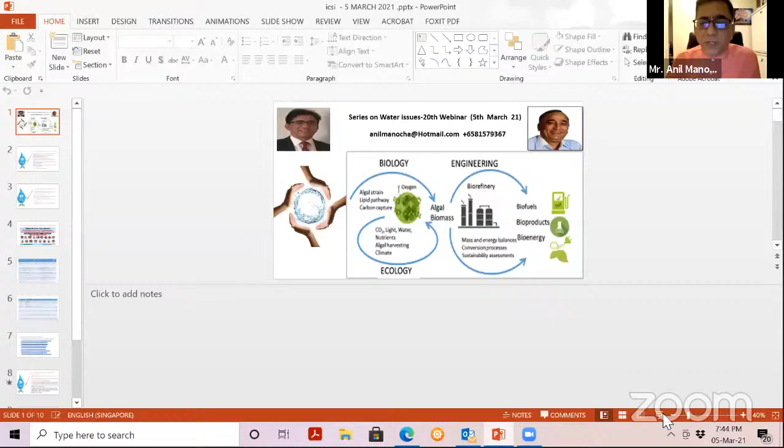Good evening, friends. Today we will continue our journey on the subjects we have been talking about so far on water. Today we are holding our 20th webinar, and just a snapshot of what we have done so far before I request Dr. Yoga Lakshmi to take over. If you look at the journey so far, we have conducted close to 20 webinars, and we have discussed topics related to water availability. In water availability, we talked about surface water, sea water, glaciers, underground water, rivers, and we also talked about how there is a stress on availability of water because of consumption and other issues.

We talked about the subject of water uses, domestic, industrial, and agriculture, and we also learned that of the total water available on this earth, only 1% is locked in rivers and underground sources, which is generally used for domestic, industrial, and agriculture purposes. And agriculture is a major consumer of water, which consumes something close to 70 to 80% of water.

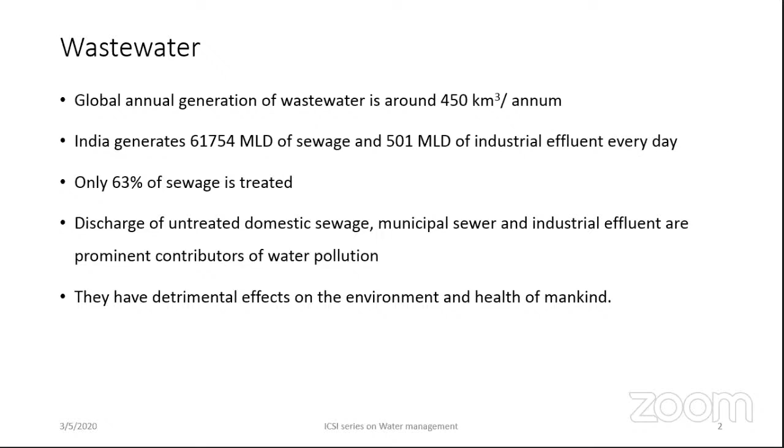Nowadays, you cannot see any water body, be it a pond or a lake, without this luxurious growth of plants, which is generally termed as eutrophication. Now, this has not only affected the health of the environment, but in general, these pollutants are being consumed daily by us, and this also has resulted in health hazards.

So now the second aspect which I'm going to talk about is biorefinery. Before talking about wastewater biorefinery, we should understand what is actually biorefinery. Now, biorefinery is a concept which integrates the biomass conversion process into other value-added products, like it can be any sort of fuel, like bioethanol or any form of biogas, biodiesel, and the other value-added chemicals and biomass.

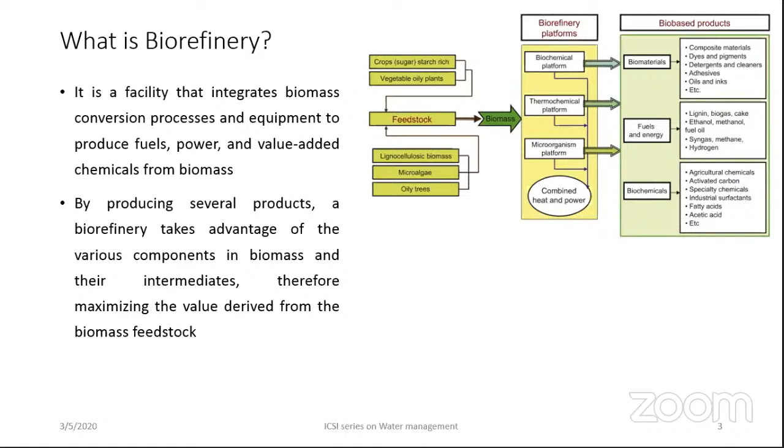Now, wastewater biorefinery. So before starting this, as sir said, there are two concepts. One is water being wasted that ends up in a wastewater treatment plant, and this wastewater treatment plant is treating the wastewater that is generated. Now, to run this wastewater treatment plant, you need energy. On the other side, we are also continuously facing energy crises.

So energy crisis on one side, wastewater being generated on the other side, and another major problem you can also relate to climate change, because during wastewater treatment, a lot of greenhouse gases are emitted from different treatment processes. And for generating energy, we burn fossil fuels, and that is also releasing a lot of greenhouse gases. So every aspect of this is generating a lot of pollution, and it's affecting the environment to a greater level. So this wastewater biorefinery concept can minimize all these three facets of the environment.

It can look into the wastewater treatment, it can give water which is fit for use on one side, and then it can convert all the organic carbon, nitrogen, phosphorus, and other nutrients into value-added products. Fuels can be generated, and also we can minimize the greenhouse gas emissions. So wastewater biorefinery can bridge a gap between the concept of biorefinery and wastewater treatment. It will generate products which would be economically viable and enhance resource productivity, and it will also produce water from the wastewater up to an acceptable quality level.

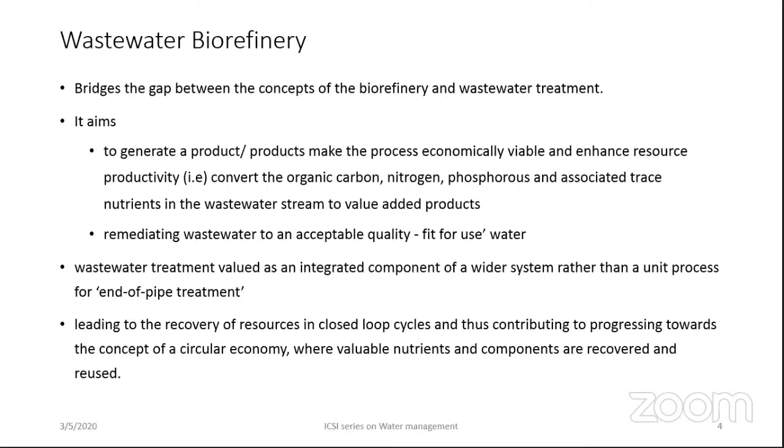Now, the focus of this wastewater biorefinery is not only just treating the water, but also recovering the resources from the wastewater. It is like a closed loop system, and you can also say it is a sort of circular bioeconomy. Now, I have been saying since the beginning of my lecture that wastewater can be thought of as a wealth. It's being looked into as a resource, and I told you there's a paradigm shift.

If it is portrayed as a story, earlier when these wastewater treatment plants were established, the focus was only on organic removal. Then with the problem of eutrophication, the scientists thought it's not sufficient only if you remove organics. It is very essential that you remove the nutrients too. Now, once the nutrient removal technologies have emerged, the focus is on emerging pollutants. On the other aspect, it is also thought of as a resource.

Now, wastewater is organically rich, and it contains around 37,052 tons of COD. COD is nothing but the organic constituent which can be potentially converted into any form of energy or any other value-added product.

The focus of the wastewater treatment plant is not only treating and discharging, but it affects human and environmental health. So many countries, to focus on environmental sustainability, have converted wastewater treatment plants into a resource or biorefinery. Many countries are currently working to attain this sustainability, converting sewage treatment plants into resource plants.

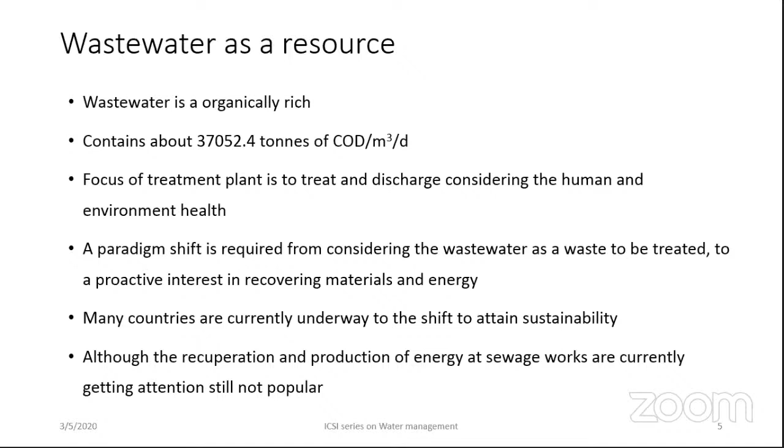I'm not sure people are aware of wastewater treatment plants, so I'll outline what one is and from which process energy can be generated. I'll be focusing only on the energy aspect, not on what chemicals or biochemicals can be produced. My lecture will mainly focus on fuel generation aspects and what technologies can be used for recovering energy from wastewater treatment plants.

So just to outline what a wastewater treatment plant is: the wastewater generated from different households is carried through a sewer network and brought into a common pumping station, from where it is pumped to the treatment process. A wastewater or sewage treatment plant can be divided into three phases: primary treatment, followed by secondary treatment, and third, tertiary treatment.

In primary treatment, the focus is only on physical separation, where floatables like plastics or any other big logs or twigs are all removed by the screen chamber, followed by the grit chamber, where small grit, stone, or silt material is removed.

Once the grit is removed, it is transferred into the third chamber, the primary clarifier, where solid materials in the wastewater are removed by simple settling. It is allowed to settle for almost 2 hours, and the solids are settled.

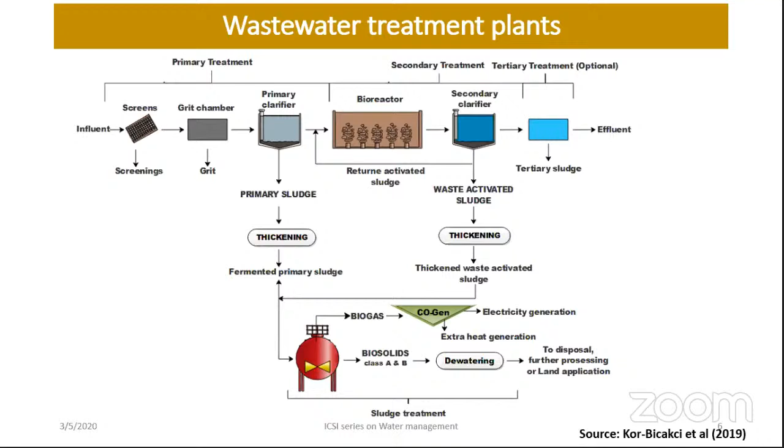Now if you look at the source of energy in wastewater treatment plants, the source of energy can be looked at in two different aspects: the wastewater itself acts as a source of energy, and the second is the sludge or biomass generated from the wastewater treatment plant.

That is the primary sludge, which is generally the solids in the wastewater, and the waste activated sludge, which is the biomass from bacterial activity. When they consume organic matter, they start producing biomass, called waste activated sludge. They also act as a source of energy.

If you look into this, almost 30 to 55% organic richness is there in the sludge, and it also contains nitrogen, phosphorus, and potassium, along with some heavy metals. The calorific or heating value available is around 12,000 to 15,000 kilojoules, which can potentially be converted into energy.

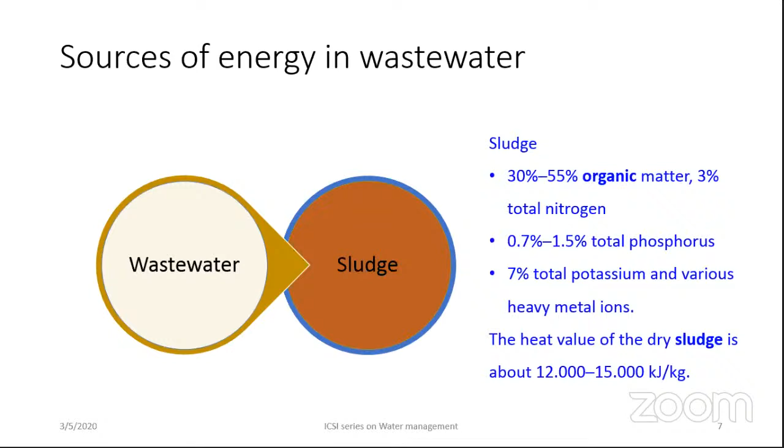Coming to the technology available for converting this energy, I mentioned anaerobic digesters. They are a classical example, and many other technologies are coming up based on this anaerobic digestion concept. Let's look into what anaerobic digestion is and what process occurs inside.

I'll talk a little about the digesters, how they work, not too deep into the technicality. Anaerobic digestion is done in the absence of oxygen, where the organic matter present in the sludge is degraded by the action of microorganisms in the absence of oxygen. The end product produced is biogas, and you also obtain a nutrient-rich digestate or slurry.

This digestate has a lot of nutritive value, and it can be used as a fertilizer or manure.

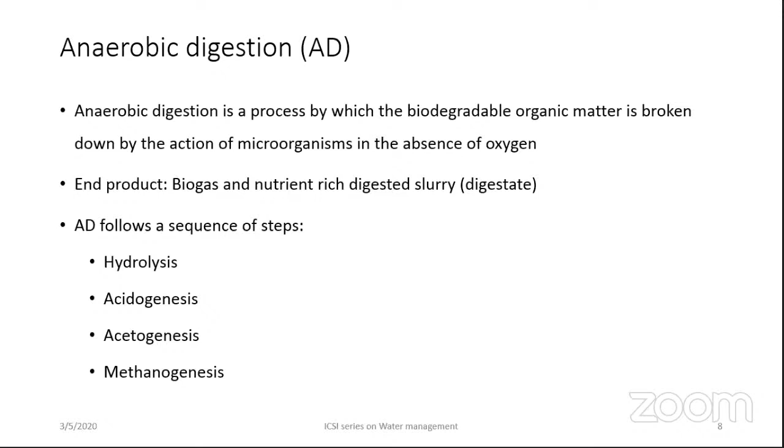The anaerobic digestion process follows four basic steps: hydrolysis, followed by acidogenesis, acetogenesis, and methanogenesis. This flow chart will clearly explain the different phases.

The sludge, which has complex biopolymers like proteins, carbohydrates, and lipids, is broken down into simple substances through the hydrolysis process, converting into simple sugars, amino acids, peptides, and fatty acids.

In the conversion of complex polymers into simple polymers, a specific group of bacteria, the hydrolytic bacteria, breaks them down. Once the simple monomers or oligomers are formed, acidogenic bacteria act on them and convert them into propionates and butyrates, which are nothing but short chain volatile fatty acids.

Here the acetogens act during the acetogenic phase, and convert this into hydrogen, carbon dioxide, and acetates. These acetates are further consumed by the methanogenic bacteria and converted into methane. Even the hydrogen is also converted into methane.

I would like to add a point here. If our purpose is to stop with hydrogen, you can use a methanogenic inhibitor to kill these methanogenic bacteria so that methane will not be produced. Methane is also a greenhouse gas with global warming potential, so if hydrogen is a clean gas with high energy yield, we can play with the microorganisms, stop methane production, and generate hydrogen instead.

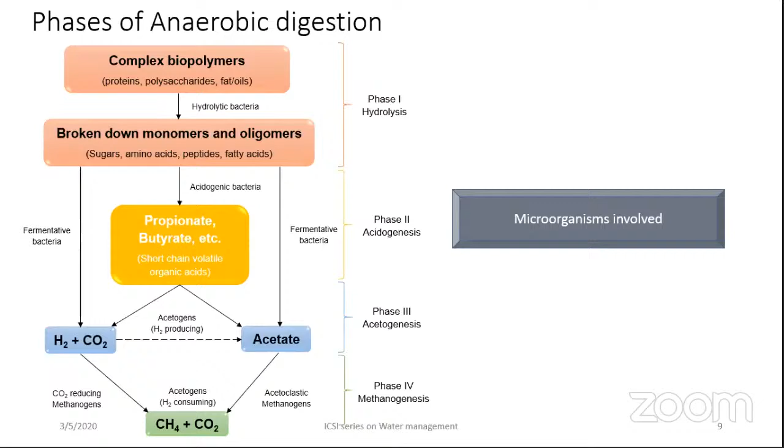Looking into the composition of biogas generated, it has a calorific value of around 18,000 to 26,000 kilojoules per meter cube. The composition has methane ranging between 55 to 75%, carbon dioxide around 25 to 45%, followed by water up to 7%, and other trace gases like hydrogen sulfide, ammonia, nitrogen, hydrogen, and so on. So biogas is also generally called methane gas, similar to a biogas plant, and you can bring this into a natural gas standard fuel.

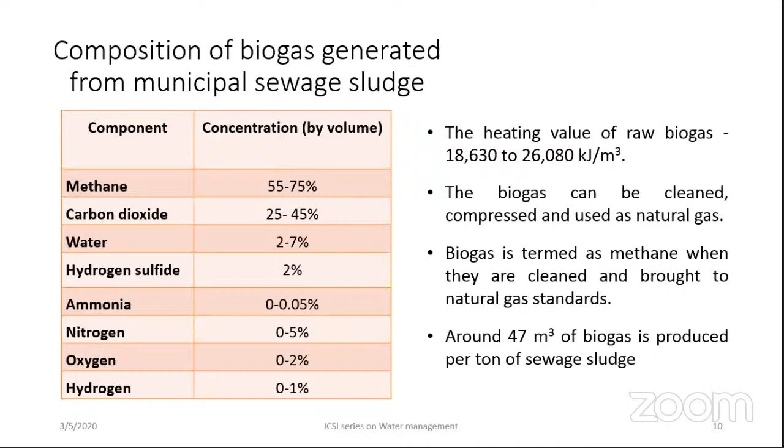As operating conditions, the favorable pH is 6.5 to 8, and temperature works in both mesophilic and thermophilic conditions. 20 to 35 days are required for conversion of this biomass into biogas. Basically 3 steps are involved: liquefaction of solids, digestion of soluble solids, and gas production.

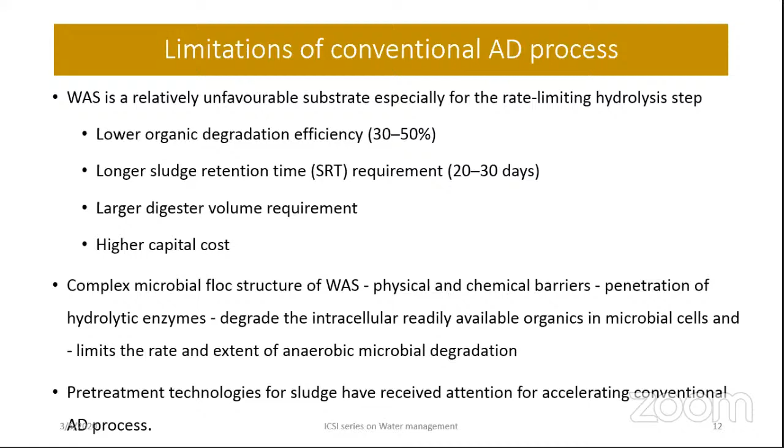So this is one technology where the waste sludge or the solids generated from wastewater can be used and converted into biogas. Now, the other technologies which are used directly to obtain energy from the wastewater, I have outlined here three different technologies. One is the Upflow anaerobic sludge blanket reactor, the anaerobic baffled reactor, and MFC or MEC, the microbial fuel cells, microbial

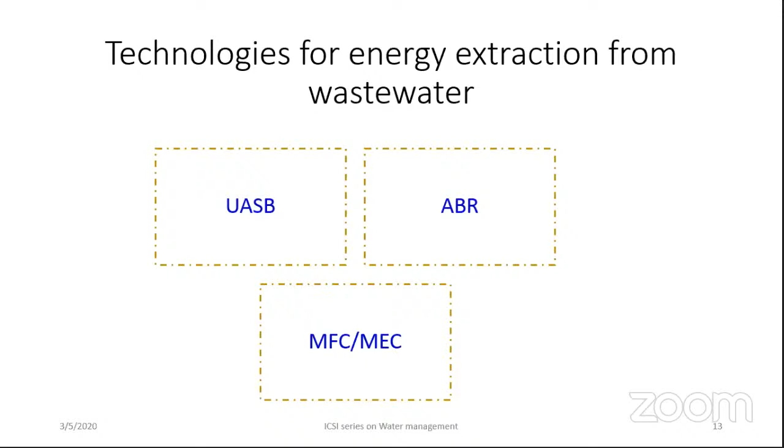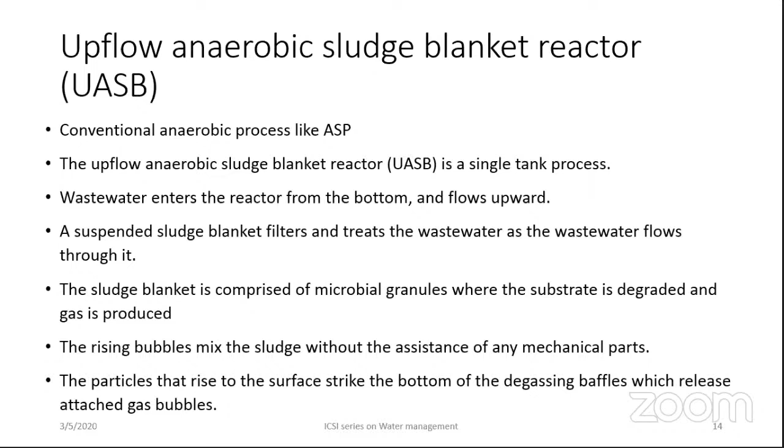electrolysis cells. Now, UASB, or the Upflow anaerobic sludge blanket reactor, is also an anaerobic reactor which is used for obtaining energy from the wastewater. It is a conventional classical example for treating wastewater by anaerobic means, and this is done in one single tank. I'll show you the image, then maybe you'll understand.

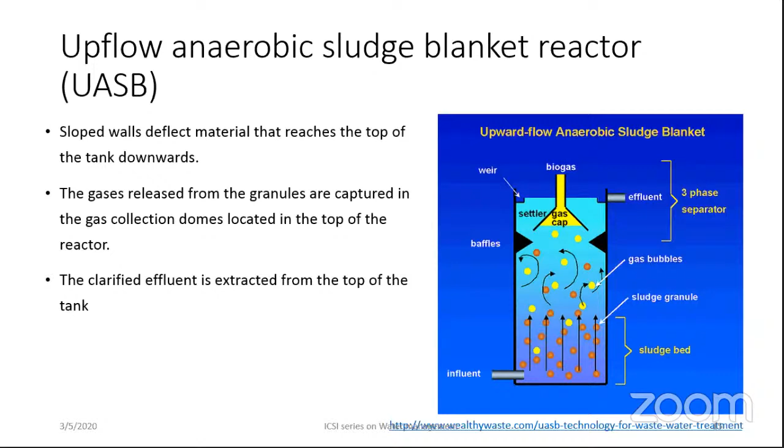Again, it works in a similar fashion to generate biogas from wastewater. Then there is the anaerobic baffled reactor. This is again a modification of a UASB reactor, I would say. If you see this reactor, it's actually being used as a decentralized plant. Decentralized and centralized systems, I'm sure everybody knows, but for people who are not aware, I'll just say what decentralized is.

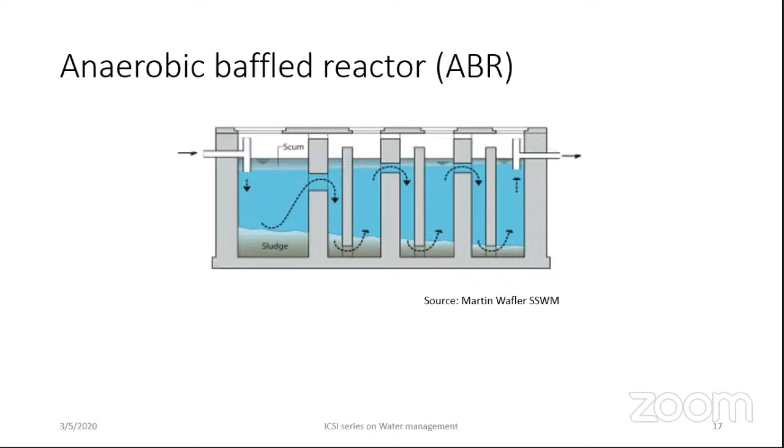So this is again another technology which can be used for biogas generation and for the treatment of wastewater. This is the third technology I was talking about, the microbial fuel cells and microbial electrolysis cells. This is one technology which is coming up. Maybe 10-15 minutes back, I spoke about a lot of research going on to have a technology which is self-sustainable. The energy that is generated is used to run its own system. So this is one technology which is very helpful. It works in such a way.

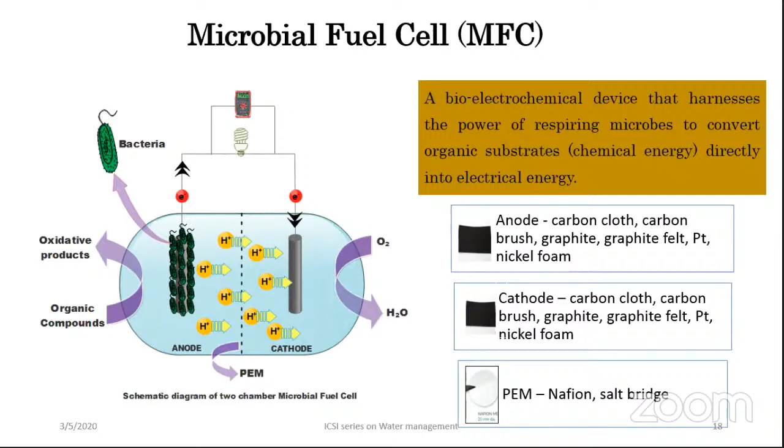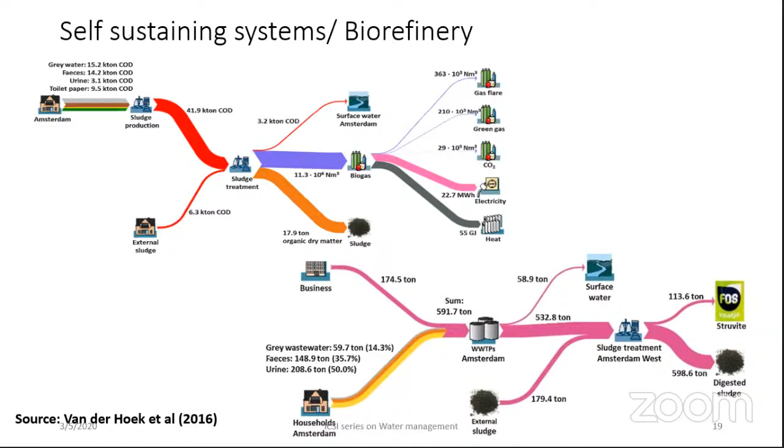Thank you, Dr. Yogalakshmi, for bringing the concept of waste to energy. As most of our participants will notice, nothing is waste in this universe. Today we talked about the concept of waste to energy and the respective technologies. Anybody interested in technologies can go back to these presentations, get more details and ask for clarification. We also talked about the importance of treating sewage and treating waste from industry, from households and all those things.

Dr. Yoga also brought up that only about 67% of sewage is treated and so much sewage is still untreated. And she's from Punjab and she talked about the problem of crop waste, which is a big challenge to handle. Getting back to the basics, we are talking about circular economy. We bring the concepts of green emissions, reducing waste. How do we generate energy from waste? If we start implementing these technologies one by one, we will be able to reduce the gap between demand and supply, whether it is water, food, or energy.